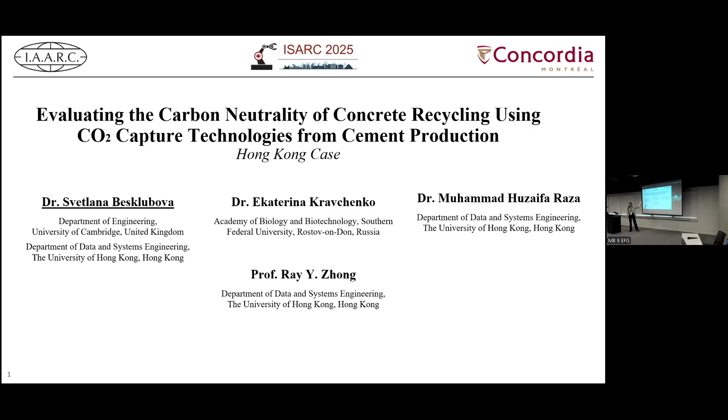So first of all, we're going to talk about concrete recycling and how to improve the property of recycled concrete. We're going to use carbonization technology, and where we're going to take the CO2 emission from is going to be the cement plant. Let me just give a bit of background, because it's going to be a Hong Kong case study, or Asia overall.

So Asia uses a lot of concrete, and of course we have a lot of concrete waste, which constitutes a major portion of construction and demolition waste generated by the construction industry. During the demolition of buildings, we have concrete rubble, which comes to the recycling facility, and through further crushing and recycling processes, we can get high quality recycled aggregate, which can be moved back to construction.

High quality recycled concrete aggregates can be moved back to the construction site as an aggregate for new concrete, fill material for embankment construction, and fill material for land reclamation.

So to give you some more statistics about how big the problem is, the construction industry in Hong Kong annually uses about 17 million tons of aggregates. The majority of this, approximately 88%, is utilized as aggregate in concrete production. But actually, more than 2 million tons can be obtained from recycled concrete aggregate.

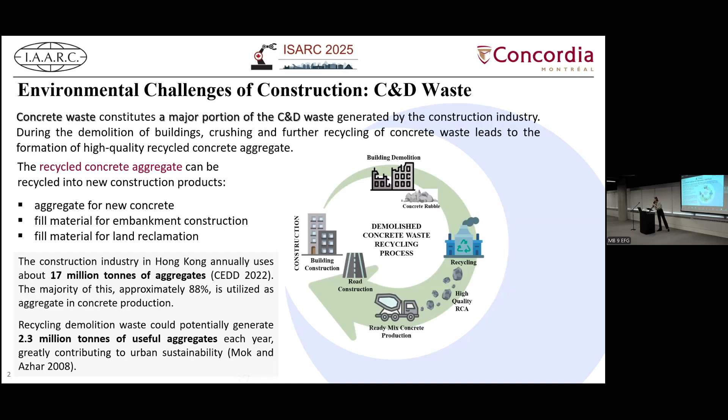So also when we recycle and crush concrete rubble, during this crushing process we get waste concrete powder, or waste cement; it's different terminology. And these byproducts make up about 30–70% of the concrete used, depending on how small we want the recycled concrete aggregate to be.

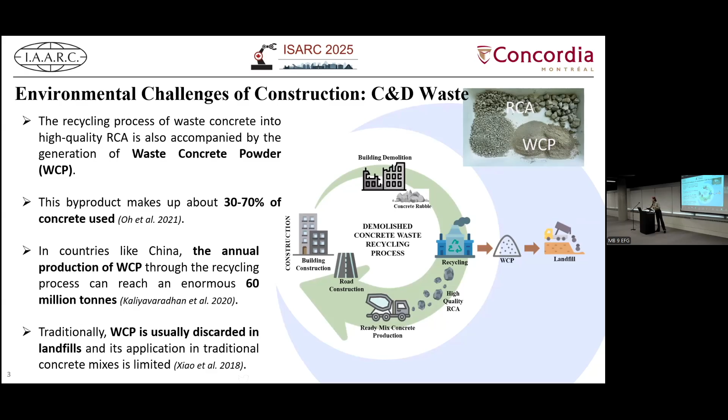And in countries like China, the annual production of waste concrete powder from the recycling process can reach an enormous 60 million tons. And if you look at the process, traditionally the waste concrete powder just ended up in landfill. What we're trying to do is think about how we can bring WCP back into the cycle.

So some solutions can be proposed where we use carbonization technology to strengthen the property of waste concrete powder. Then we can use it as a substitute material instead of cement or some natural materials. Carbonization is a process where the concrete absorbs carbon dioxide from the air over time, which can strengthen the material and reduce its carbon footprint.

Some good cases already exist. First of all, the carbonization process can be done in a laboratory. Usually they use commercial CO2, and good cases come from France, where they use CO2 from the cement plant to do the carbonization process.

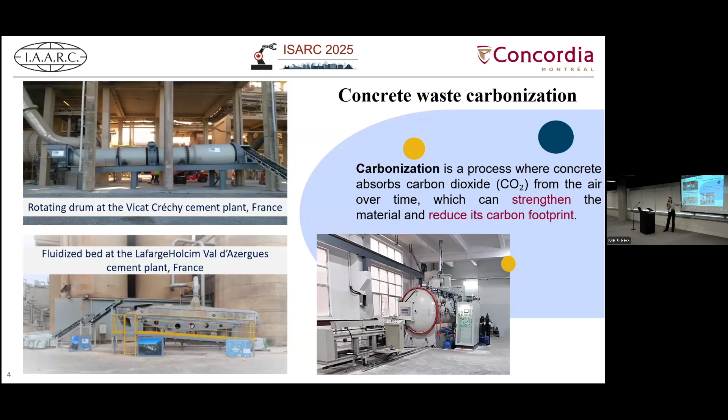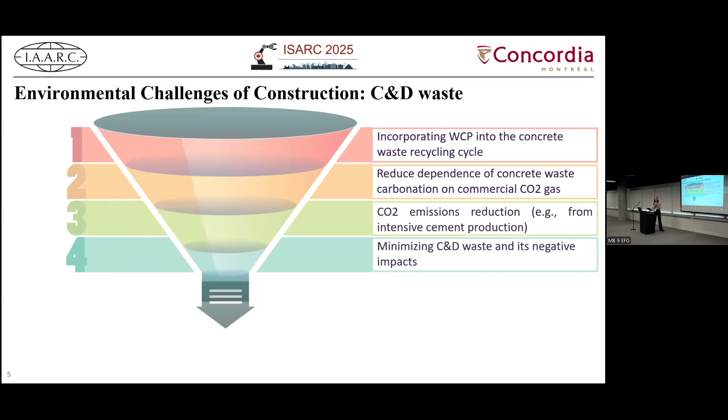Let me just summarize the different problems and add some more points. First of all, we try to incorporate waste concrete powder into the concrete waste recycling cycle, and reduce the dependence of concrete waste carbonization on commercial CO2, which is quite common in the laboratory.

And the biggest problem: we try to think about how to reduce emissions from cement plants, because so far cement plants contribute 8% of CO2 emissions from a global perspective, and also minimize construction and demolition waste and its negative impact.

So we formulated the study problem: the study aims to assess the feasibility of recycling demolished concrete byproducts, waste concrete powder and recycled concrete aggregate, into aggregate substitutes for use in concrete mixes by utilizing an active carbonation method with flue gas from cement plants, an area which hasn't been considered much in research.

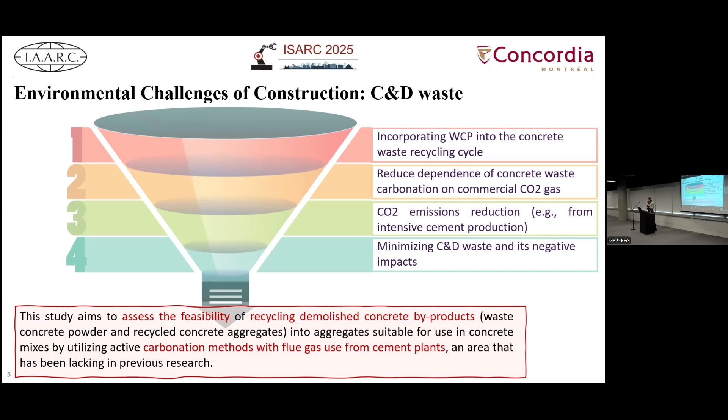The research we started was to understand what is going on right now in the recycling process currently. So we have construction sites, and demolished concrete comes to the recycling facility and to concrete production. So to formulate the feasibility model, we use an activity-based costing approach.

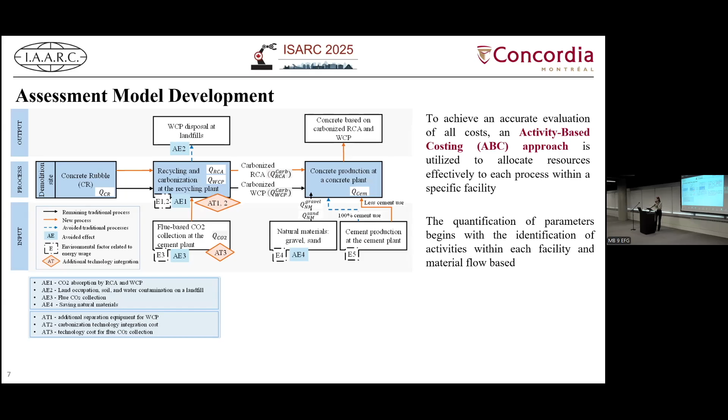First we need to understand what the parameters are, and we assign different parameters according to the processes. And we start to formulate the model, in which all the materials we consider as a flow. So in the flow we have concrete rubble, recycled aggregate, and WCP, CO2, cement, natural materials. And through each facility, different materials contain different resources. For example, to recycle concrete rubble we need energy, we use equipment.

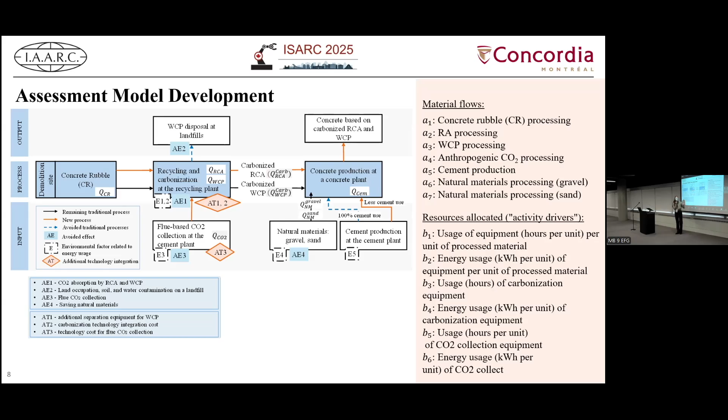So to formulate this, we propose matrices with the different material flows, and we assign what kind of resources we need to use according to each facility. So this matrix shows how much resources we need for 1 unit of material. We need the cost to understand the cost and also the quantity, so we can have the overall picture.

And we do the same thing in terms of environmental cost. The same matrix, different material flows. We assign how much capacity it takes to recycle them and assign the quantity and cost.

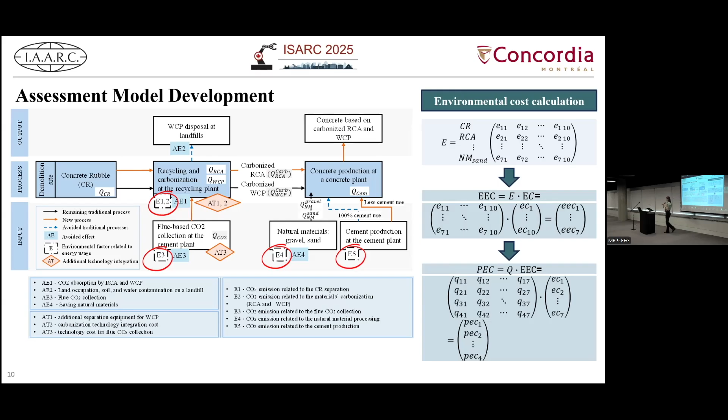To apply our model, we use a Hong Kong case study. Basically, we try to propose this for the government. We do this project for the government. So we take a specific sorting facility, which is under the government, and another facility around Hong Kong, which is the bigger player, and also try to assign what technology has to be added in which facility.

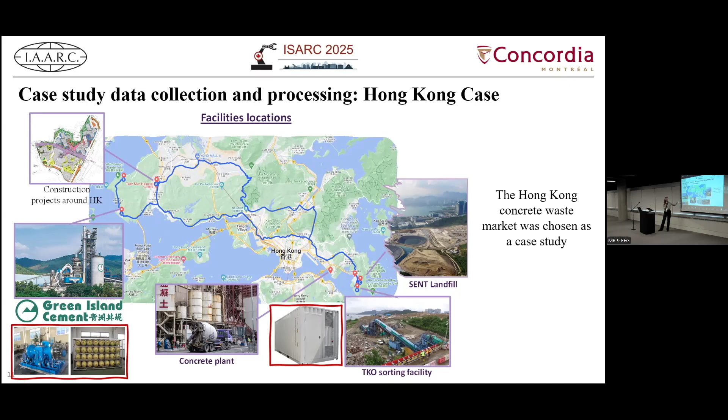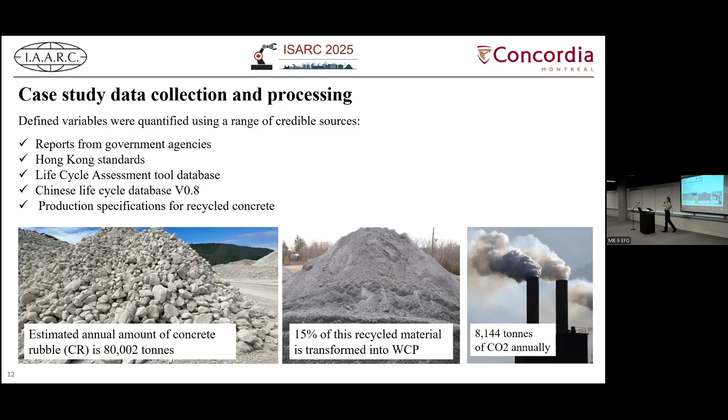The data was collected from government reports, Hong Kong standards, life cycle assessment tool databases, and production specifications for recycled concrete, and the estimated annual amount of concrete rubble is more than 80,000 tons. We assume that 15% of recycled concrete comes as WCP, and we also calculate how much CO2 we need to carbonize all this amount.

As a result, here you see 3 graphs. Basically, we compare the environmental cost for the traditional process and for the proposed process, and we also calculate how much it would cost to incorporate different technologies.

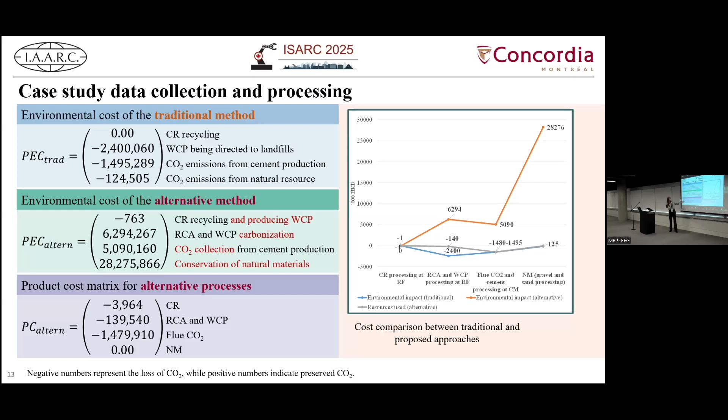And this is quite impressive: the orange graph shows the advantages of the proposed approach due to capturing CO2 by the carbonization process, CO2 collection from the cement plant, and conservation of natural materials, because if we use WCP, we need less cement and less sand. And there is quite a small price in terms of integrating the technology, because it's not a very expensive technology. This is the result.

Coming to the conclusion part. Active carbonation of WCP and recycled aggregate using flue gases from cement production significantly reduces environmental cost. Alternative recycling methods show a 362% increase in efficiency for recycled concrete aggregate and WCP, while flue gas utilization results in a 440% improvement in cement processing.

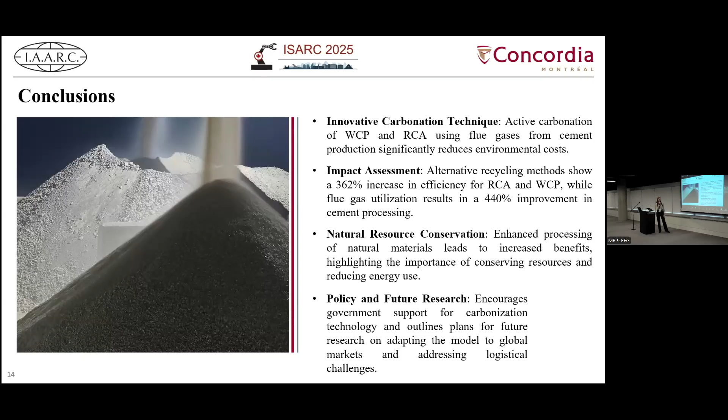Enhanced processing of natural material leads to increased benefits, highlighting the importance of conserving resources and reducing energy, and it also encourages government support for carbonization technology and outlines plans for future research on adapting the model to global markets and addressing logistical challenges.

This research is a part of a research grant.